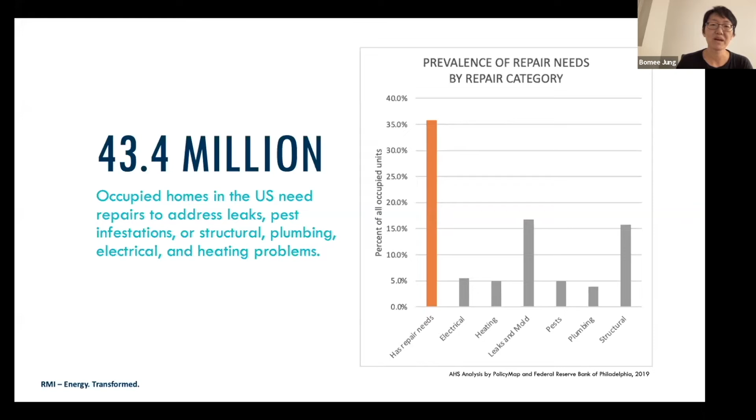And the basic fact that we have to start with is that the housing stock in the United States is not in fantastic shape, right? Something like 35% of all the occupied units in a national survey of housing quality reported that they had some kind of repair need. And of those 35%, 40-some-odd percent are reporting faults that are really pretty serious: moisture and bulk water management that lead to mold and mildew, structural problems. So we're talking about a housing stock that, even beyond affordability challenges, is really not in fantastic shape. And that is the background against which we have to talk about all of the things that passive house improves in terms of housing quality.

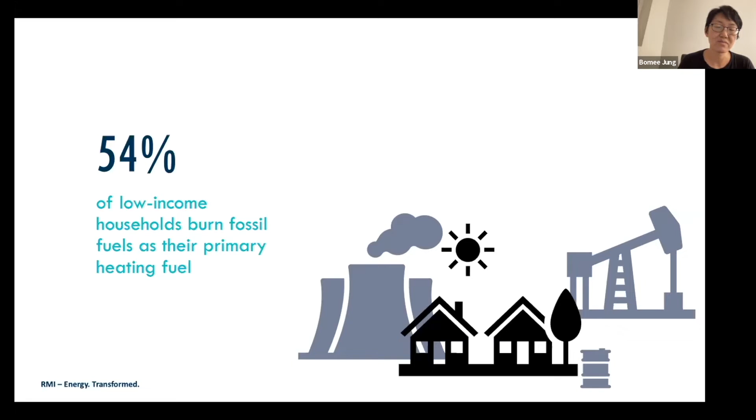When you look at how low-income and historically underserved communities fare, as you would imagine, low-income communities bear the disproportionate burden of occupying housing that is not of good quality. On top of that, we also know that dependence on fossil fuel is high among low-income families, partly because of geographic factors. But at the end of the day, there is a real health disparity related to disproportionate exposure to PM2.5, for example. And what happens in buildings that causes that is largely related to burning fossil fuels, both in the building and community-wide impacts. So as we've seen as a policy driver recently, the push behind this message of getting gas out of buildings is not just a matter of climate change, it's also real health impacts.

So as I said, what we did in our research was really to try and establish the ground truths of health research that relate to building quality and environmental quality, and we tried to do that in a very broad-based way. So not just looking at indoor environmental quality, but climate risks as well, things like the ability of the building to protect from heat waves.

And basically the three messages that we wanted to put out into the community is, number one, that we really want to be pushing for electrification in the context of a holistic package of housing quality improvements. And so, I think there is a message that could be heard these days as, if you just electrify all the doodads, then we're all good. What we're saying here is that what the evidence shows is that it's housing quality that matters, not just the electrification in terms of benefiting residents.

And then the second takeaway is that because of disproportionate vulnerability and disproportionate exposure to health harms generally, when you fix these problems, the health benefits that result accrue disproportionately to low-income communities, which is where it becomes an equity and justice issue. And then the third message that we have is that much of what we can do can be done locally. It's fantastic that we have a federal government that's now mobilized around climate goals, but we don't need to wait for those things. There's a lot that cities and state governments can do today.

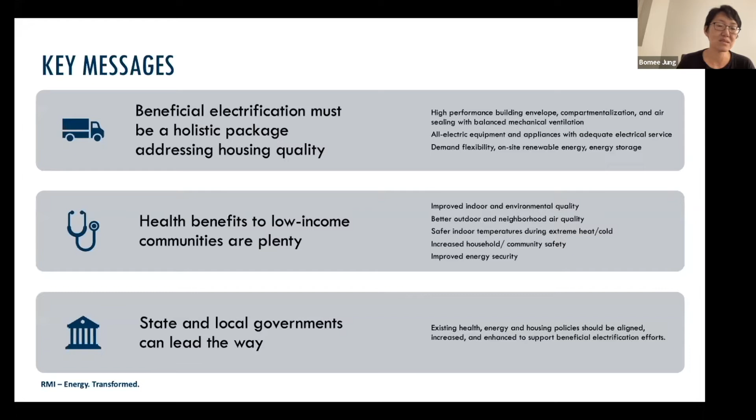Next. So one of the things that I wanted to explain before turning over to Yu Ann to go through the findings in the report more in detail is this idea that there is a definition of beneficial electrification that applies to housing. So beneficial electrification, as we hear it in the literature and in the dialogues today, really is talking about balancing environmental benefits with benefits to operating electric grids, right? Generally speaking. But if you look at the history of the term, I actually found the guy that I'm pretty sure is the father of the term beneficial electrification.

And this term actually came from a time when gas companies were arguing that because of the transmission losses in electricity, electricity should be abandoned in favor of gas for efficiency reasons. And so the electric industry was arguing, well, no, there are beneficial uses of electricity where electricity really is the better solution. And they looked at things like computers, and you can't use computers on gas, right? And so it started out as a very different concept, this idea of beneficial electrification, and then more recently it was picked up by

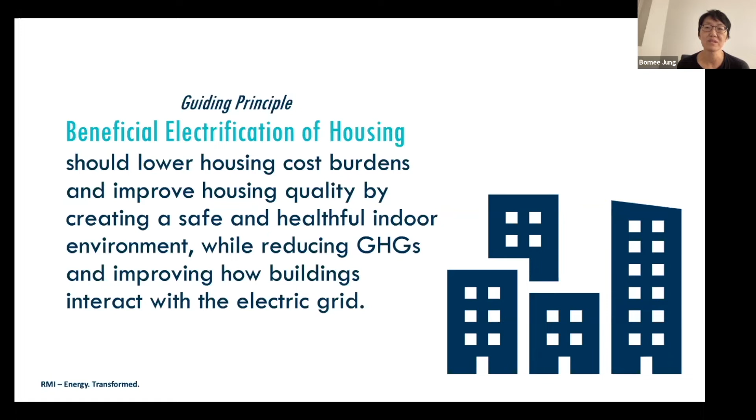And so what we're arguing here is that if you're going to use this term beneficial electrification and apply it to housing, really you need to look at it in terms of what are the benefits that are relevant to housing quality. Buildings and homes exist first and foremost to provide safe and affordable housing. And so it's not just a matter of the greenhouse gas impacts. It's not just a matter of the impacts on the grid. It's really a matter of what are the benefits that accrue to the residents in the housing specifically. And so that's what we mean by this term beneficial electrification of housing.

And then what we argue basically in the paper is that in order to really maximize the beneficial electrification of housing, you need to have a passive house that's electrified, right? And then we go on to show why we've come to that conclusion based on essentially health research.

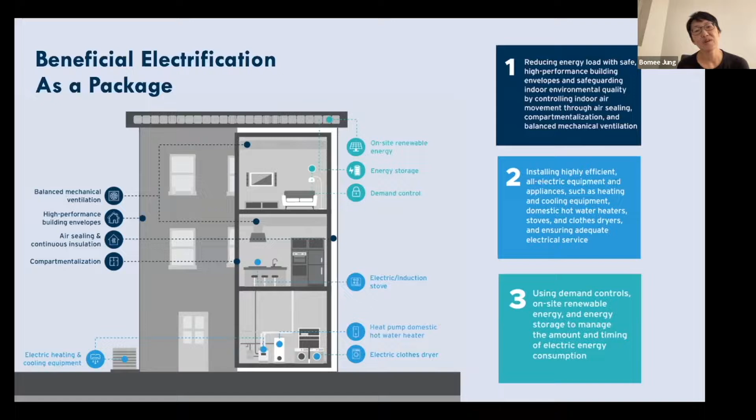Next. And then as far as how we hope for this report to be used, one of the difficulties in working on this report is that we were really trying to bridge a bunch of different areas of practice. So we would like for housing advocates to use and understand the terminology that's used by building scientists, and we would like for the building science folks to use and understand the language that's used by public health experts, and sort of get on the same page about where our priorities are overlapping. And now I'll pass it on to Yu Ann.

Thanks, Bomee. We used a three-pronged approach to look deeper into this topic. So first, we synthesized existing research and analysis of different building level interventions to understand how each may impact the health of residents and the community. Then we contextualized all of this information within the reality that certain communities face disproportionate economic, health, and social burdens because of many reasons. And finally, we put together some recommendations for state and local actors to further this work.

We identified that there are many mechanisms through which beneficial electrification can deliver health improvements, from indoor air and environmental quality to safe indoor temperatures during extreme heat and cold, and even increased energy security. Let's take a closer look.

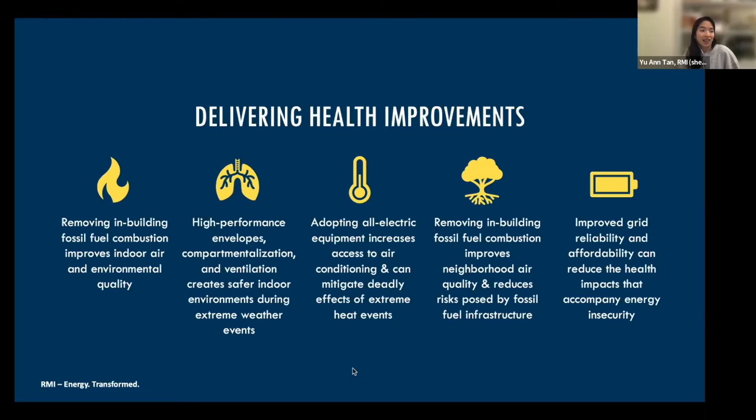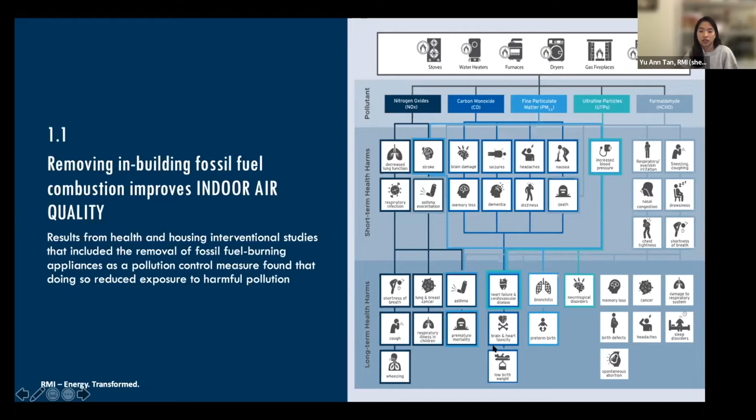So the undesirability of introducing combustion-related pollutants into the home has long been acknowledged in health literature, right? Both short-term and long-term exposure to combustion pollutants are linked to a variety of adverse health impacts, as we've demonstrated here in the table on the right. Removing any sort of in-home combustion has been shown to immediately reduce the risk of health harms such as decreased lung function, asthma incidence, cardiovascular disease, amongst many others.

Studies also show that a combination of a high performance envelope with compartmentalization and enhanced ventilation has many positive effects on indoor environmental quality. So we can see a reduction in pest infestations and the moisture conditions that often lead to mold. It also prevents infiltration of potentially polluted outside air.

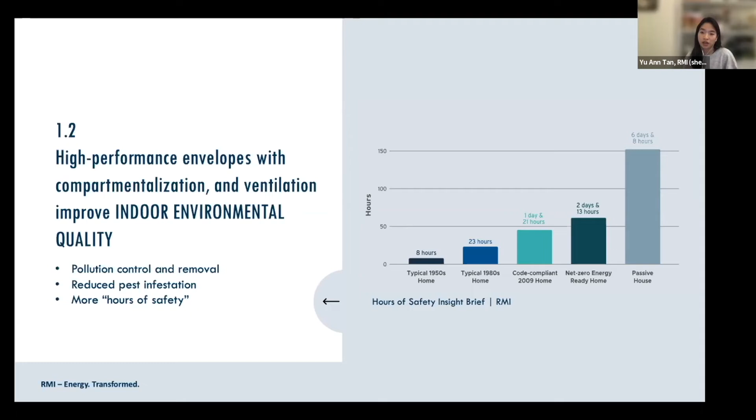Additionally, my colleagues at RMI did some modeling and found that those high performance envelopes also have the added benefit of providing increased hours of safety, which is the maintenance of safer indoor temperatures during hot or cold weather. And this analysis also compared a passive house standard building envelope to a code compliant new building during a power outage in a cold snap, and found that this passive house was able to maintain safe indoor temperatures 4 days longer than the code building.

So in our exploration, we also document the benefits of adopting all electric equipment and appliances, and how that may increase the access to air conditioning and the ability to mitigate deadly effects of extreme heat events. So high performance envelopes can contribute to more efficient cooling and safer indoor temperatures, but we're finding that they can't fully mitigate the effects of heat buildup if we didn't have AC. So like when temperatures overnight stay high, such as during a heat wave.

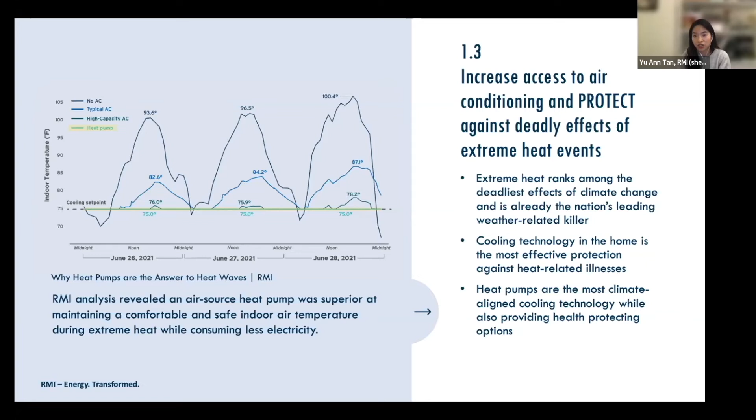And we did some analysis of different cooling technologies during a heat wave this past summer in Seattle. And we found that heat pumps are the most climate-aligned cooling technology, while also being superior at maintaining a comfortable and safe indoor air temperature.

The evidence also strongly suggests that removing in-building combustion can have a great impact on what goes on outside of our buildings. Combustion equipment in our homes, such as boilers, furnaces, hot water heaters, are typically vented to the outside. And so eliminating these would contribute to better outdoor and neighborhood air quality. And a recent Harvard study found that roughly 15,000 to 20,000 premature deaths that occur nationally in the US every year are due to outdoor PM2.5 air pollution from burning fossil fuels in residential buildings only.

We can also be reducing the demand on aging, leaky, and risky gas distribution infrastructure. And research is finding that leaking supply lines and equipment in buildings are contributing to significant fugitive methane levels in cities, which is pretty alarming.

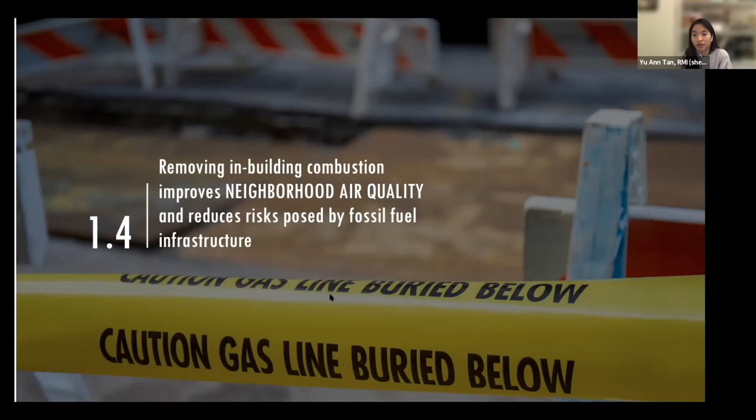Finally, the combination of electrification and high efficiency, climate appropriate smart technology gives us a great opportunity to increase affordability and reliability of energy access, which is a very important driver of health inequity. The reliability and affordability of energy access has an important impact on health.

When households are unable to adequately meet their basic household energy needs, or what is known as energy insecurity, a wide range of health issues can occur, such as stress and poor mental health, to poor sleep and cardiovascular and respiratory health. Direct health harms, such as carbon monoxide poisoning, temperature-related illness, and even death can occur when residents resort to alternative energy sources to meet needs when conventional methods fail them.

We go on to identify how communities face disproportionate economic, health, and social burdens, and why we need to center these circumstances as we start to decarbonize our building stock. So evidence shows that low-income communities repeatedly face stressors on multiple levels, and they experience both heightened vulnerability and exposure in comparison to more affluent populations. Some of these vulnerabilities we have identified include systemic racism, marginalization, and discrimination, limited access to resources, and the resulting trade-offs, as well as poor neighborhood and household conditions.

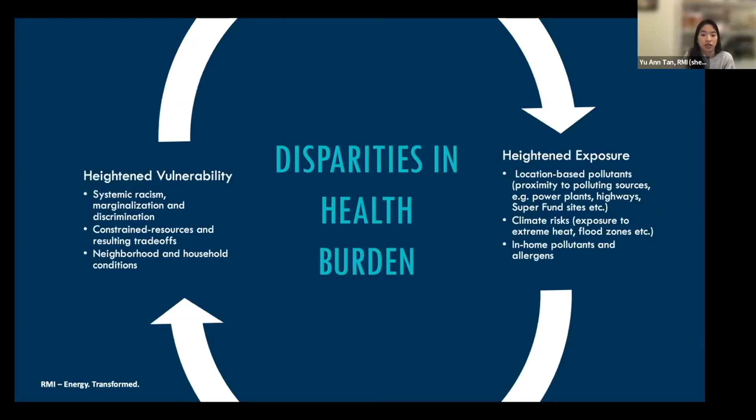These communities grapple with heightened exposure as well to location-based pollutants, for example, because they are closer to polluting sources such as power plants, highways, Superfund sites. They are also at risk to climate risks such as extreme heat, being located in flood zones, and in-home pollutants and allergens. Health research indicates that 60% of the burden of health disease is directly attributable to living in poverty and its associated risks. Studies also show that children under the age of 6 who live in a home that uses a gas stove or oven for supplemental heat are 80% more likely to have asthma than children in homes that do not.

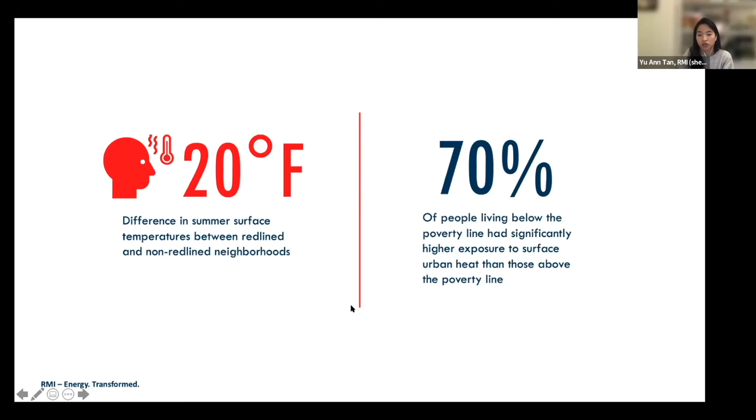In the US, summer temperature differences between redlined and non-redlined neighborhoods can approach up to 20 degrees Fahrenheit. 70% of people living below the poverty line also have significantly higher exposure to surface urban heat than those above the poverty line. The fact is that the combination of all these factors and disparities serves as a sort of magnifying glass, I like to call it, for any impact, be it good or bad.

For example, when the New York City Mayor's Office modeled the health and air quality benefits of electrifying our buildings, asthma emergency room visits were reduced by 10 times more in lower income communities compared to more affluent neighborhoods, even though the reduction in pollution was similar. The fact is, the circumstances that these communities face are immensely different, and we absolutely must be taking that into account when designing policies. Bomi will now walk us through what that might look like.

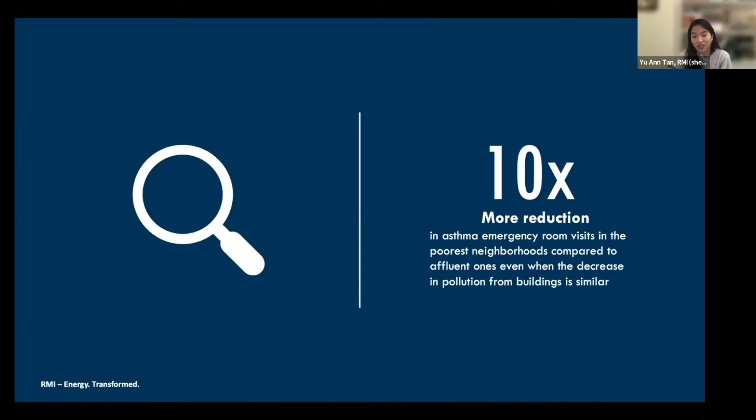Thanks, Yu Ann. If you would go to the next slide, please. So actually, if you could advance one more.

We looked at a number of recommendations, and these are not so much specific recommendations for state and local governments to go copy down. So these are not model recommendations. They're really more areas, things for policymakers to think about. And we looked at it in four buckets. One is looking at enabling policies that try to bring the voice of the affected communities into these sorts of policy discussions.

And this is really important from a climate justice perspective, because it's not just a matter of who gets benefits. It's not just a matter of do low-income residents get better buildings, and obviously that's fantastic and we want to do that. But part of what makes this conversation a really rich one when it comes to justice is that low-income communities are saying they want to have a part in that decision making. And so we looked at some recommendations about how to bridge the centralized processes that characterize policymaking, and grounding that kind of conversation more in the communities.